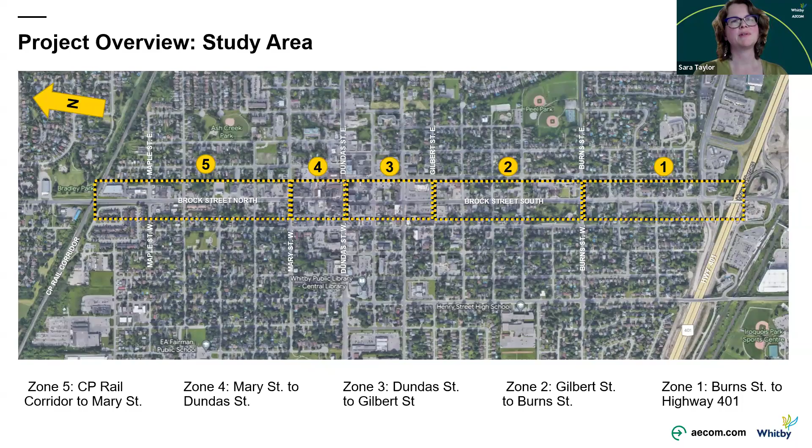As the study area is quite long, approximately 2.5 kilometers, we've divided the area into 5 zones based primarily on land use and traffic patterns. Starting from the south, Zone 1 extends from Highway 401 up to Burns Street. Zone 2 is from Burns Street up to Gilbert. Zone 3 would be from Gilbert Street to Dundas Street, and Zone 4, Dundas Street to Mary Street. Then Zone 5 is Mary Street up to the CP rail corridor. Next slide please.

So the project will be focusing on streetscape elements that are located between the property lines under municipal ownership or within the municipal right-of-way. This image shows a typical section of the existing conditions on Brock Street within the downtown area and illustrates some typical components of a streetscape.

So that includes the roadway, on-street parking areas, sidewalk areas, and what's called the amenity zone, which is the space between the curb and the sidewalk. And that would be where things like street lighting, trees, and other types of planting, street furniture, and any decorative paving would be located.

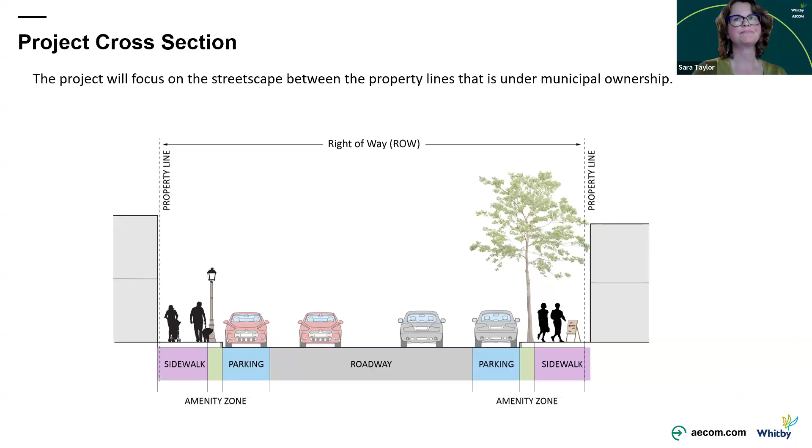Next slide, please. So the timeline for the project will be divided into 3 phases. Phase 1 is the concept design, which began in fall 2023 with our background study and existing conditions review. We're currently here at the first public engagement stage in April.

And so we'll be using the feedback we hear from this engagement to develop the concept design alternatives over the summer. Then in the fall, we will present those concepts back at our second public engagement stage. And then we'll be using that feedback to finalize the concept and recommendations, which we will present to council in winter 2025.

That will take us to phase 2, which is detailed design. So the town will take the approved concept design and use that to develop detailed designs that will form the basis of the construction drawings and documents, taking us to phase 3, which is construction and installation, anticipated to occur in 2026.

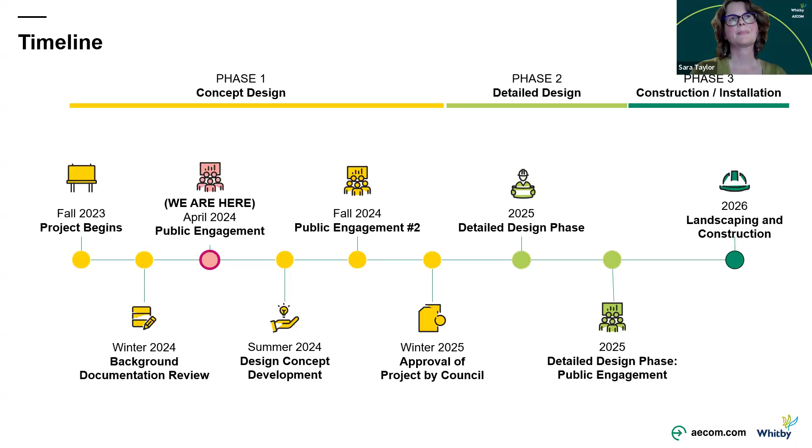So the project does have a number of different considerations and recommendations that were already identified through some background documents and research. Some of those include things like the Downtown Whitby Secondary Plan, which involves the overarching policies for Downtown Whitby, such as heights, land uses, and setbacks.

We also have the transportation study as well as a parking study that was done within the last few years that has helped provide some input into some of the recommendations and considerations that we're looking at tonight.

And we've also had studies like the gateway study. So the gateways into and out of downtown Whitby have been identified through a study and how we can help enhance those spaces as we come into our historic commercial core.

So out of that, there were a number of different elements through those studies that had already been considered, including pedestrian safety, traffic calming measures, sidewalk improvements, street furniture elements such as bicycle racks and benches, green spaces and areas, historical features, event spaces, transit and transportation, and parking.

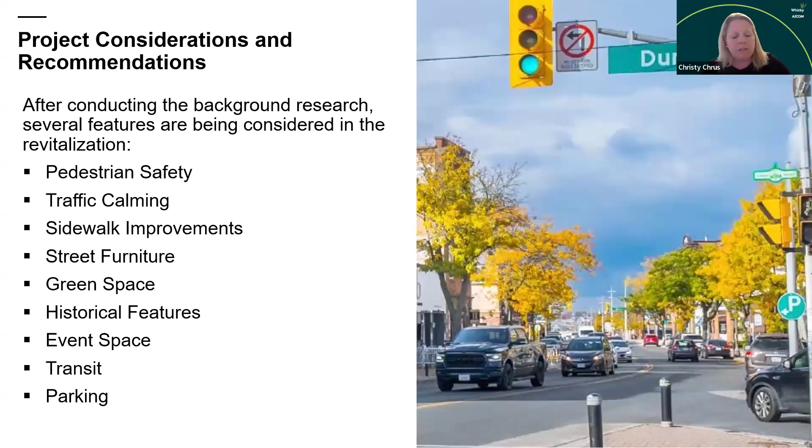Thanks, Christy. So these are design features and best practices that have been pulled from the background study reports, as Christy was mentioning. So the first design features we will look at are related to pedestrian safety and accessibility.

As sidewalks are the primary way for pedestrians to travel along the street, those areas should be a key focus for the project, as well as looking at paving treatments for the spaces between the sidewalks and the curbs. The materials that currently exist along Brock Street vary quite significantly along the length of the area. We will also be considering the use of curb extensions or bump outs at key intersections, as these help to improve pedestrian visibility and shorten crossing distances.

And we'll also be considering the use of pedestrian aids, such as indicator push buttons and walk countdown timers at major intersections. Next slide.

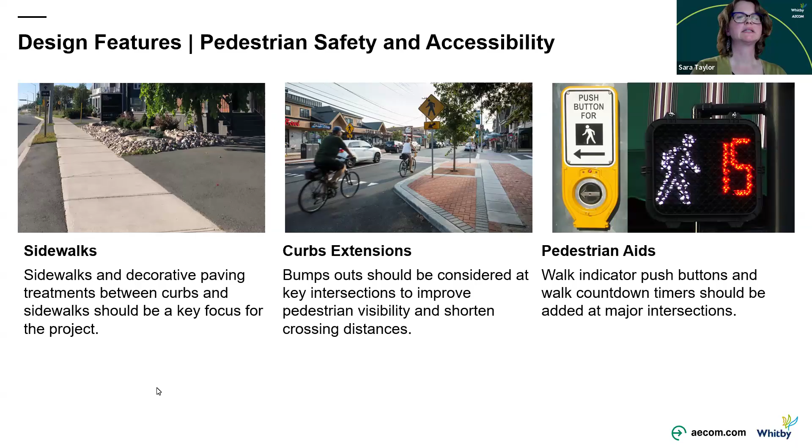I'll hand this one over to Nair. Yeah, that's one of the traffic calming measures we're considering, reducing the number of traffic lanes, specifically the sections between Mary Street, where we have the Whitby Clinic, and Maple Street, where we have the Tim Hortons. And then the section between Dunlop Street, where we have the Dollarama, and Burns Street, just south of Centennial Park. So, reduction in the number of lanes from the existing 4-lane on those sections to potentially 3 or 2 lanes. For the 3-lane cross section, we would have basically 1 lane in each direction and a center lane, which serves as a 2-way left turn lane.

Guess moving on to the next slide. I think, Nair, actually, we were gonna pause here a little bit and just see if there was any questions. Yeah, there's a couple questions in the chat. Maybe we can pause on this.

Tracy, I see we have one related to, I think it's actually bike lanes was the first comment - are bike lanes planned for? So bike lanes are part of our overall transportation plan. And I'm wondering, Tara, if you're able to maybe provide a little bit of background in terms of bike lanes and kind of some of the routes and areas that we have identified in the downtown area for bike lanes.

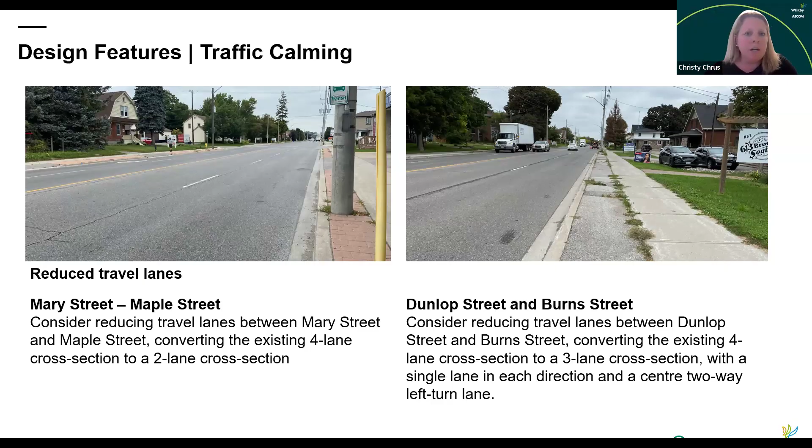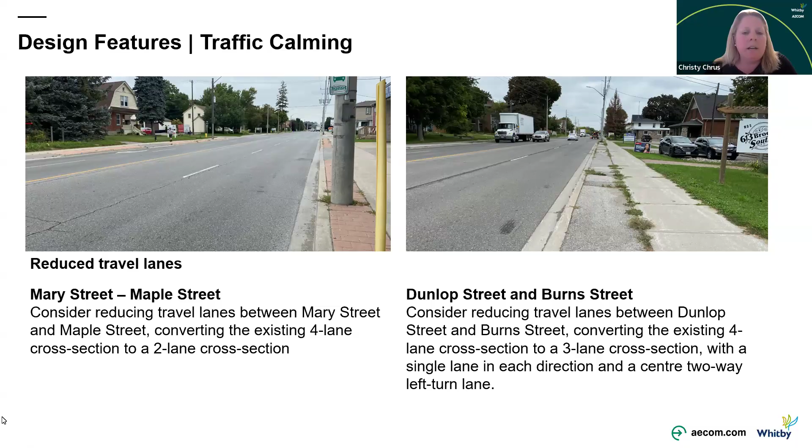So thank you for that feedback, we're going to take all of that into consideration. We do know that in the historic commercial core along Brock Street, the streetscape features are the brick paver stones and some of the trees. It is a little bit bumpier, and some of the trees have pushed up the brick pavers. So that is definitely part of this study, looking at how we can make that space more pedestrian friendly and accessible so there aren't tripping hazards. If there's something specific that needs immediate attention, please let us know and we can have our operations staff go out and take a look. So I'm going to pass it back, and I think we'll go to the next slide about a few more intersection safety features.

We're considering implementation of a roundabout at the intersection of Brock Street and Burns Street, just south of Centennial Park. A roundabout would help manage traffic, create a traffic calming impact, and create a welcoming entrance to the downtown.

Another thing that's been brought up is providing protected pedestrian crossings along the corridor. We're considering those at a few locations, namely St. Lawrence Street, which to the southeast provides access to Sir William Stephenson Public School and Kids Safety Village. Currently the nearest controlled pedestrian crossing to the south is Consumers Drive, and to the north is Burns Street, with a distance of around 500 meters between those two intersections. Typically we'd consider a controlled pedestrian crossing when the distance exceeds 200 meters, so that meets the criteria, among others, which is why it's a location of consideration.

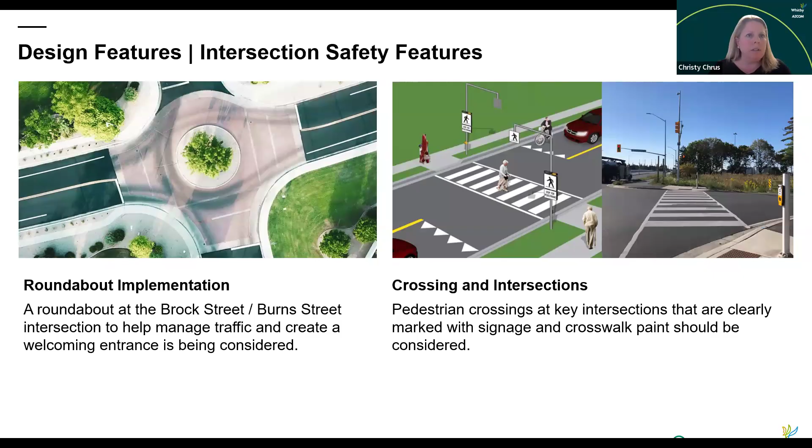Is there anything else, Tracy, to highlight, or have we summarized everything? I'm just looking in the Q&A too. I think we've dealt with David's question on how the Brock Street roundabout deals with pedestrian traffic, and Tara's been able to speak to that.

There's a question I might go to from Susan: are bikes allowed on sidewalks in Whitby? I see them all the time on Brock Street. This is another reason why sidewalks are not safe for pedestrians, since we're on pedestrian safety still. Maybe Tara, you might want to field that one.

Thanks, Christy. Cyclists aren't allowed on sidewalks in Whitby. Through the Highway Traffic Act, they are considered vehicles. We do see it often though, so that is why we do want to provide the cycling infrastructure. A lot of times cyclists are on sidewalks because they feel there are no other options available. So we are looking at providing those options for cyclists, but no, they should not be on sidewalks.

Thanks, Tara. Before we leave this, I saw a question from David on how we are dealing with commercial traffic. Nair, I wonder if you want to respond. The background study, the Transportation and Pedestrian Safety Action Plan, looked at that, and although the plan is not to prohibit commercial traffic on Brock Street, a reduction in number of lanes will discourage commercial traffic from using Brock Street. It looked at parallel major corridors to the east and west. To the east, we have Garden Street, which has 4 lanes, 2 in each direction, and was deemed to have reserve capacity to accommodate commercial traffic diverted from Brock Street.

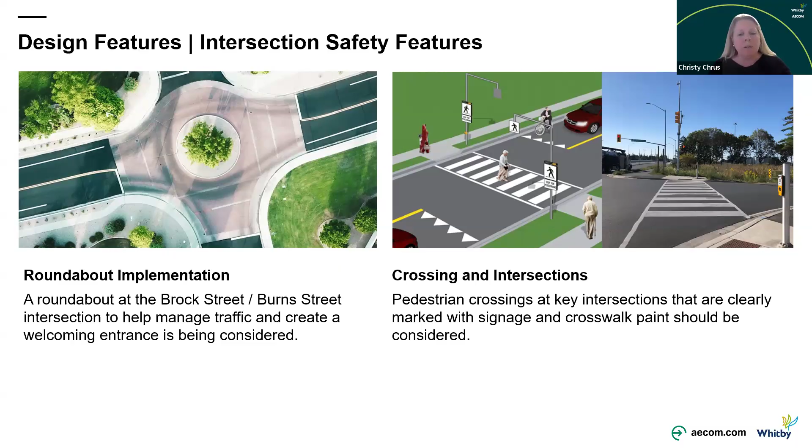Great, thanks, Tara. I think a few of the other questions I see, we're going to get to those in a few other slides. So I'm just going to pause maybe on the questions. We can come back to traffic. I know obviously it is a hot topic, so we're happy to come back and circle back to it, no problem. I'm going to move us forward onto some of the design features.

So first one we're going to speak to a little bit is about lighting. Obviously we want to make sure that we have pedestrian scaled lighting that can not only improve the visibility and safety for those walking in the area, but also enhance that nighttime ambience along the corridor.

So the two images on the left and in the middle show the current light standard poles, the historic looking poles that we do have right in the commercial corridor along Brock Street. And the image on the right-hand side shows where we start to get to the bookends of the corridor, from Dunlop South or Mary North, we get back into the overhead hydro wires.

So this study is also going to look at what the costing and options would be to consider burying those hydro cables underground. Not only does this help provide a more aesthetic street, but it is more inviting, and it also allows for tree growth and a number of different elements. So we are really considering how we can support and enhance this.

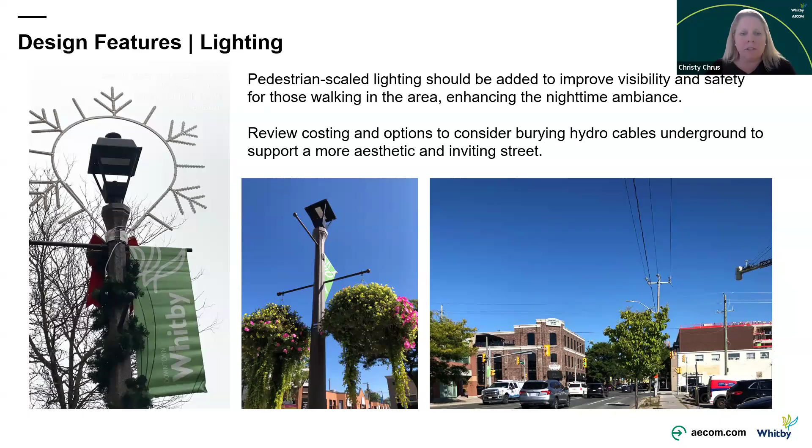The image also on the left, we have those snowflake lights that are in the downtown during the holiday season. And we are looking at implementing a year-round light topper or seasonal type decoration that would help again to provide more lighting in the historic commercial core of downtown Whitby, both along Brock Street as well as along Dundas Street. So I'm going to move into street furniture.

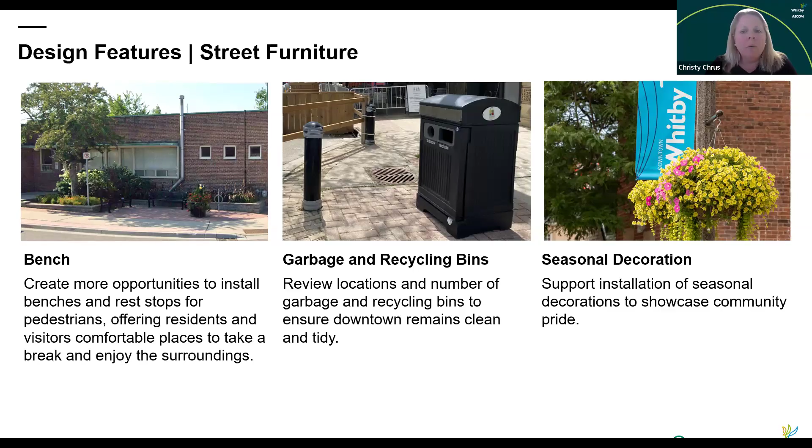Perfect, thank you for that. So the last item on this slide is what we call seasonal decorations or other types of decorations in downtown Whitby. You can see from that image on the right, we have implemented the banner program, which aligns with our new Whitby branded logo and banners. We have flower baskets maintained and organized by our Downtown Whitby Business Improvement Area, the BIA. In winter, you saw the image of the snowflake as a seasonal decoration, and the BIA also does garlands, wrapping the poles with garlands and lights. Part of this program will look at how we can do other types of decorations downtown to help enhance that space.

So now I'm going to pass it to Sara, and she's going to speak a little bit about green space. I know there were a few questions in the chat about this as well.

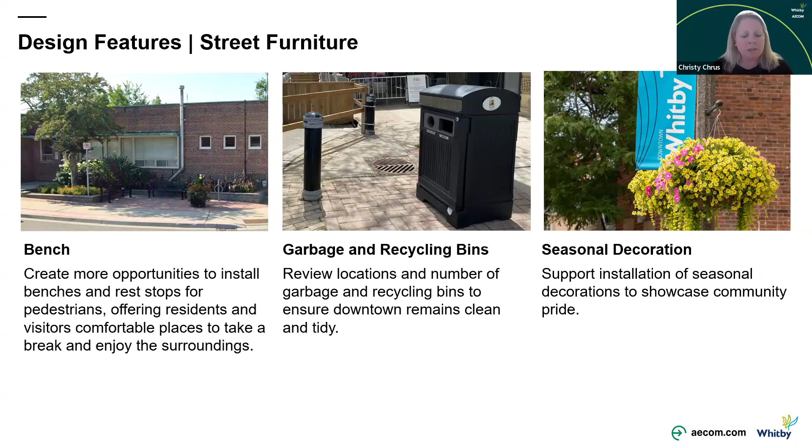Do we have a question? Yeah, I think there's a few in the chat, Sara. We had one about trees. Sorry, I just lost it. My apologies, a few more questions coming in. We had: does the design of the sidewalks keep the existing mature trees?

That would be the intention. If it's a healthy, mature tree, we would take that into account as we plan where the sidewalks would be located or what kind of construction would happen. You really need to minimize any disturbance within the root zone, so there may need to be special construction practices within those zones. But definitely we want to protect any healthy trees that are currently existing.

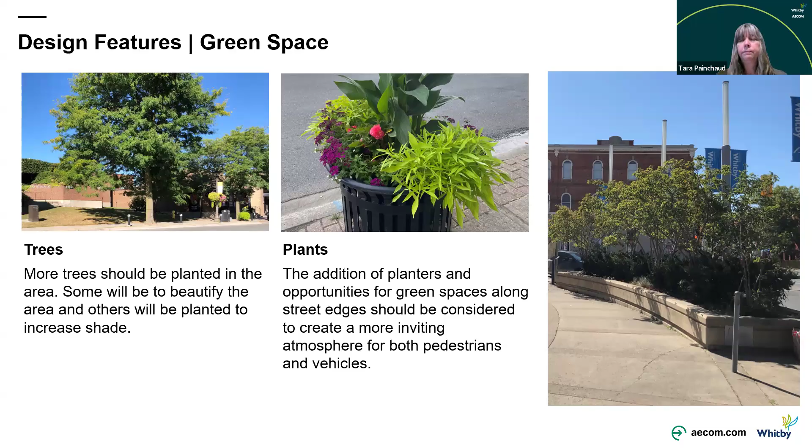Maybe we can, Tracy, maybe, yeah, perfect, thanks.

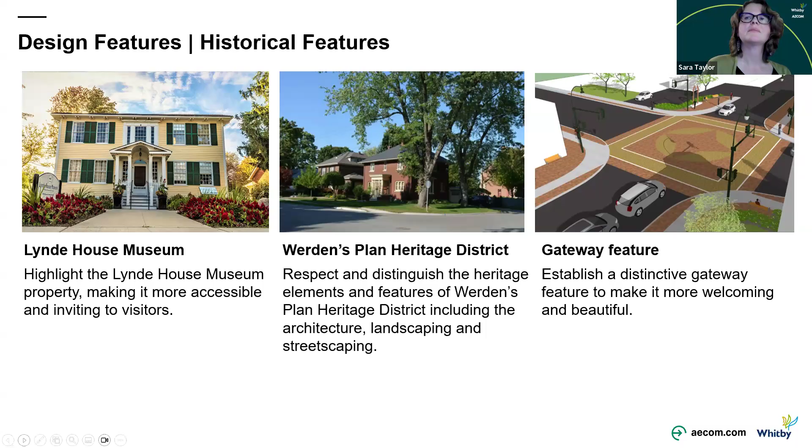One of the other areas important to the community and businesses is creating great opportunities to support events in our downtown area, specifically along Brock Street. The street can be looked at in a number of different ways. One thing is what we call flexible street design, which could include a rolled curb for some portions of Brock Street, allowing for a seamless space between the sidewalks and the road. That creates a real pedestrian environment and accessible space, and that's something that could be looked at as part of this study. Other things could be boulevard bollards that come out of the ground so you can close off a street very easily.

I know some municipalities have looked at that in their historic areas as well. So we are really cognizant that we want to bring events to downtown Whitby. Our business improvement area is also eager to support events in our downtown space.

So we have another poll with this one as well, and we're just getting some feedback in terms of what types of events you would like to see in this area. We have a couple of ideas, and Tracy can throw the poll up.

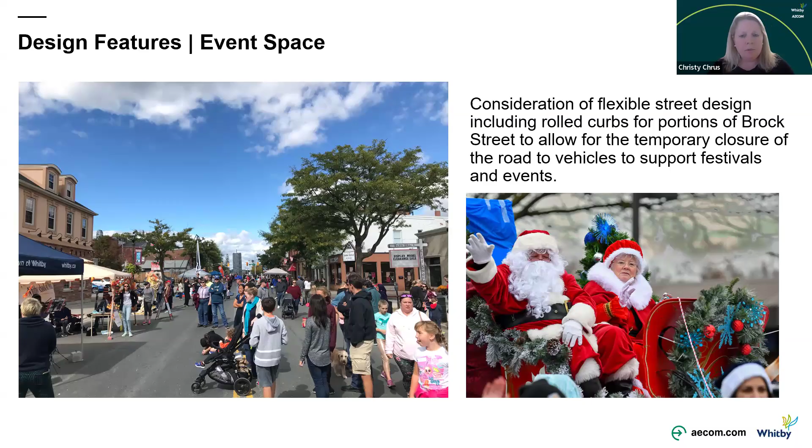Okay, so maybe we can move on to the next slide, which is some transit considerations, and I'll pass it back to Nair. Thanks, Christy.

Yeah, we're considering implementing bus shelters at key locations along the corridor. Mainly the locations are Brock and Gilbert Street intersection, where the FreshCo Plaza is, Brock and Trent Street, and Brock and Maple Street, where the Tim Hortons is. Along with that, we're considering also the bike racks, which would go along with that.

So yeah, again, we'll coordinate with Durham Region Transit since they operate the transit lines there. But yeah, those are the locations that we've identified as potential candidates for bus shelters.

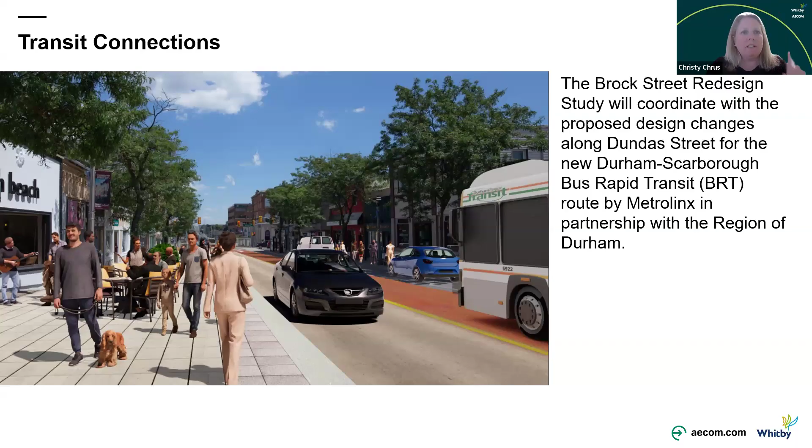So parking, obviously, it's usually another number one topic that we hear about a lot in our downtown area. We're very cognizant of making sure we're providing great parking and on-street parking opportunities for businesses as well as customers or user groups coming into downtown Whitby. This study is going to look at opportunities to support on-street parking spaces on both sides of Brock Street. We're also cognizant of providing accessible parking spaces. I believe we do not currently have any accessible parking spaces along Brock Street. We have them on Byron Street by the Legion, as well as on Elm Street on the south side. So we're very cognizant of making sure we're looking at how we can incorporate accessible parking on both sides of the road, as well as on the north and south side of Dundas Street, so that all different user groups are able to access businesses and the downtown area easily.

The other thing too is we've looked at, in the past number of years, basically since COVID, on-street patios, and we've installed a few of them along the Brock Street corridor.

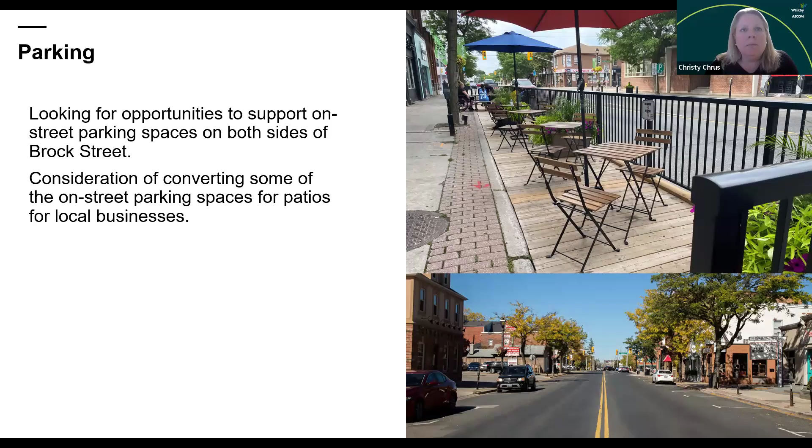There's a question about the Bell building, and is it no longer used as mechanical switches, no longer needed? There's actually a large Bell line that runs under that building and throughout the downtown area, so I think it is still quite well used. We can have discussions with them. They do have a great green space on their lawn there, and I know there's been thoughts about whether we can put some chairs or use that space differently. We're happy to help create some of that dialogue as part of this study to see how we can enhance that space that's already there. It also has a really nice honey locust shade tree right in front of it.

Tara, I've got another one for you about how the Mary Street improvements intersect with the Brock Street improvements, if you can speak to that a little further.

Yeah, absolutely. Our plans for Mary Street include on-street cycling, improving what's there now. It's an urban paved shoulder right now, and we were looking at enhancing that to a bike lane where possible. We're looking longer term at whether we can provide a multi-use path along Mary Street, and depending on what happens along the Brock Street corridor, that multi-use path would tie into the pedestrian infrastructure along Brock Street. Whatever we do from a streetscape enhancement standpoint, we can pull that into the Mary Street corridor as we do improvements, just to tie in the two facilities.